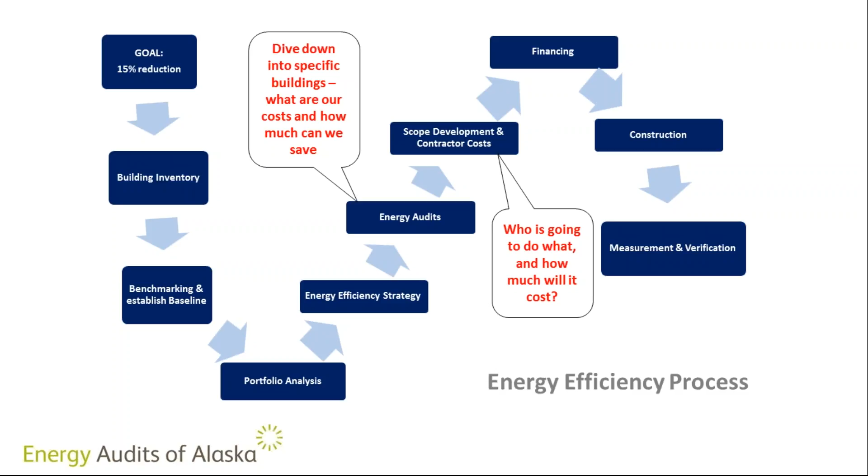What can we do to specific buildings? That comes out of the energy audit activities. Who's going to do what and how much will it cost? That comes out of the scope development. How are we going to pay for it? Comes out of the financing piece.

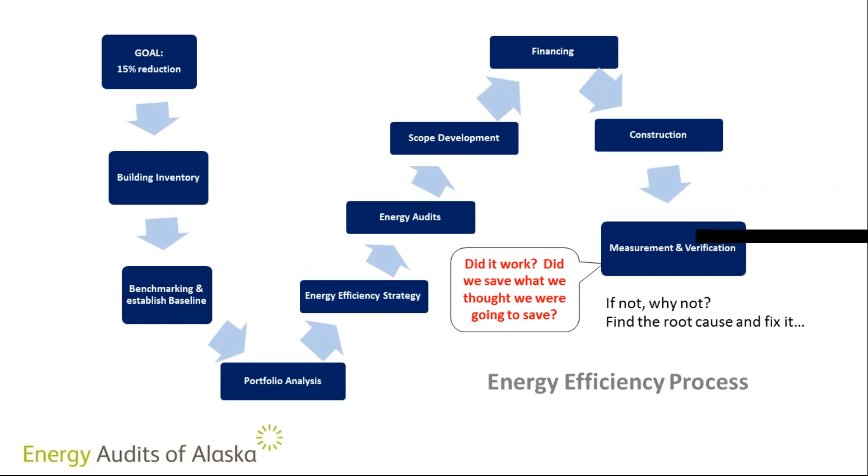And then let's make it happen. Comes out of the construction piece. And then finally, did it work? Did we save what we thought we were going to save? And if not, why not? We've got to find the root cause of why we didn't save what we thought we would, and fix it.

So a typical energy audit includes the benchmarking, the baseline, and an audit. And you can see why just having an audit is not enough.

The building inventory piece and the benchmarking piece has been under evaluation. It's been in process for a number of years. AHFC, Alaska Housing Finance Corp, has an ARIS database, and state agencies and a lot of your buildings have been input into that database.

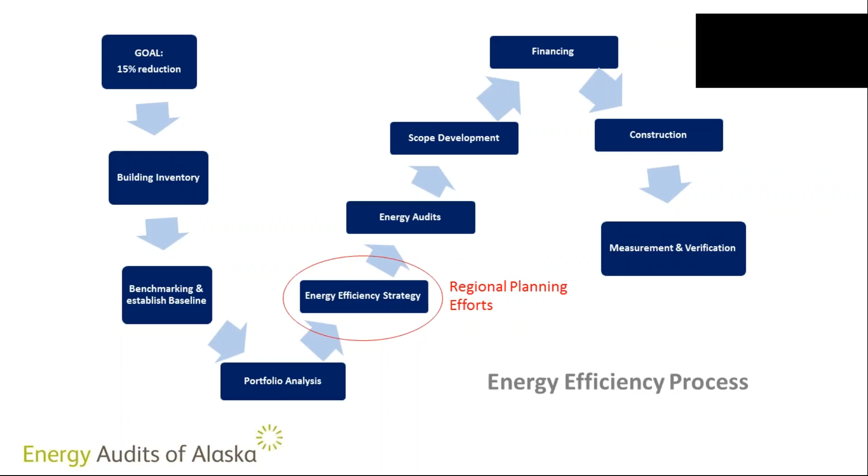And the most comprehensive vehicle, I guess you could say, for energy efficiency is what's called an ESCO project. ESCO stands for Energy Service Company. Amber Donahue from Siemens is going to be talking about ESCO projects. Siemens is an ESCO. In that case, all of those pieces are included in the project.

Portfolio analysis is kind of an orphan here. It's not dealt with very much at all, and I'm a big proponent of it, so we'll get into that in a little bit more detail.

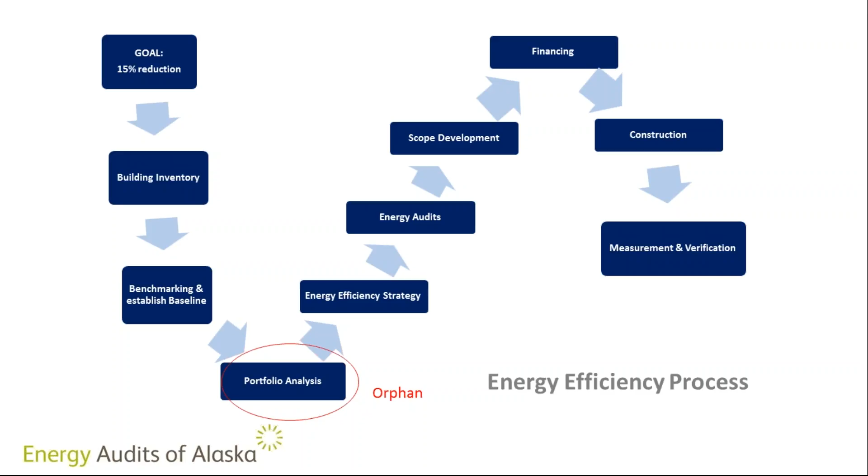So why energy efficiency? And how much is it going to cost? How much can I save? And what happens if I do nothing?

So the why—the first piece that I look at when we talk about energy efficiency is, where are you on the energy efficiency curve? There are certain energy efficiency measures. I'm going to call them EEMs. They're also called energy conservation measures, ECMs, but I'll use the term EEM.

There are certain EEMs, like setback thermostats and air sealing, that generate large savings. And then as you move up the curve, or to the right, the EEMs start to generate less and less savings. That doesn't mean they're not important. It just means the immediate savings is less.

Air sealing and setback thermostats are commonly the quickest return, highest savings measures in small buildings. If you've got a larger building with mechanical ventilation, meaning air handlers, then oftentimes air handling issues—the amount of outside air you're bringing in, the amount of exhaust air, et cetera—those are going to be the biggest bang for the buck EEMs.

But in smaller buildings, it's going to be setback thermostats and air sealing, and then following that is lighting. In buildings with high amounts of refrigeration, like stores, village stores, refrigeration is going to be a big one. And then envelope upgrades, even though many buildings need them, they're not a high return, quick payback item. They're typically a 20 to 30 year payback.

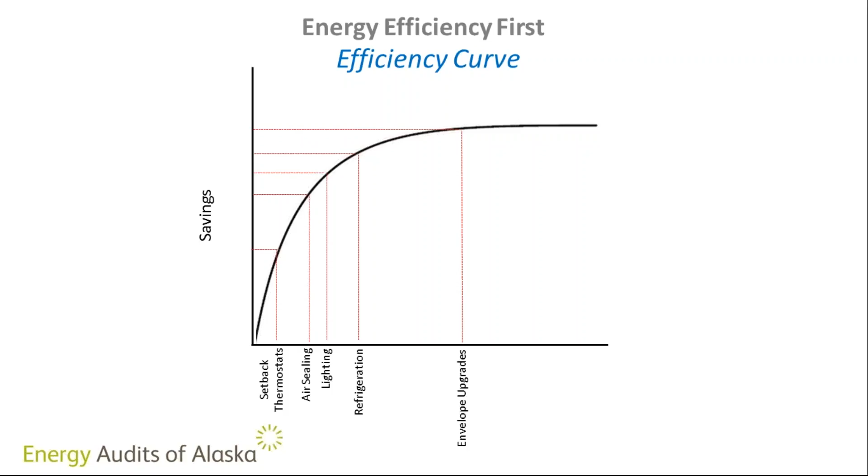Kwethluk was one of the 5 communities in Alaska that was awarded a START grant, or activity technical assistance through the START program. It's a Department of Energy program through the Office of Indian Energy, I believe. I was part of the team that went into Kwethluk and performed the analysis there. What we decided and what they approved was a community-wide efficiency program. What can we do across the whole community to affect energy consumption?

Excuse the noise in the background. Sorry, okay, I'm back with you.

Excuse the technical difficulties. So what we found was the average homeowner's electric cost is $1,200 a year. Their average fuel cost is $4,000, and the total non-residential energy cost in the village is about $500,000. The total residential energy cost is about $1 million. This was across 188 homes and 25 commercial buildings.

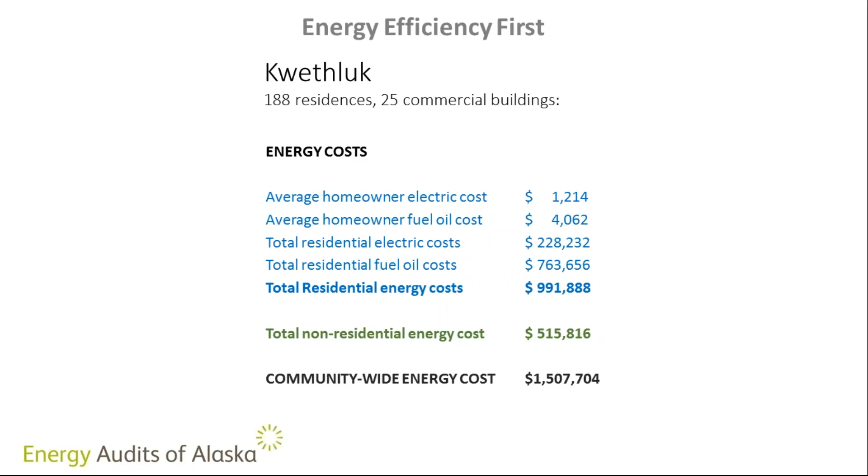And the goal in Kwethluk was to implement 4 EEMs, which included setback thermostats in every building, air sealing of every building, LED lighting throughout the entire community, and upping the insulation in the attic to R60. Those were the 4 what we call low-hanging fruits.

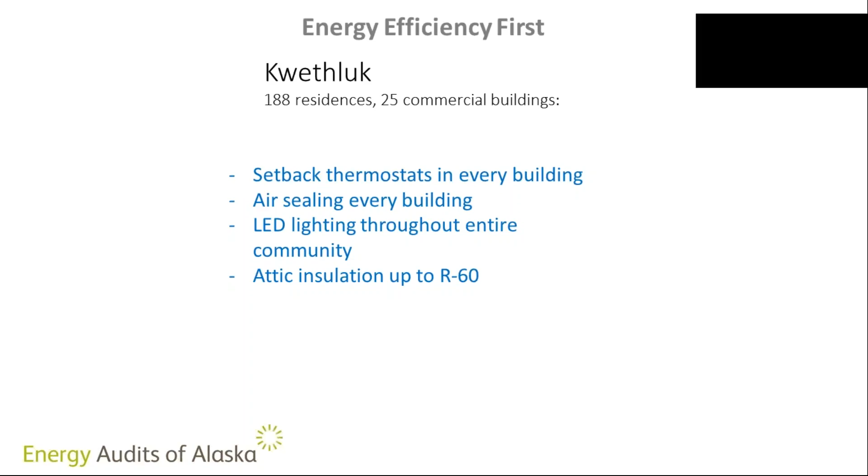So this example is presented as a way to show you what's possible in the village or in a community, a rural community, if you look at it from a community-wide standpoint. Overall, it's just under 13% savings in the community for the 4 simplest lowest hanging fruits that are available in just about every community.

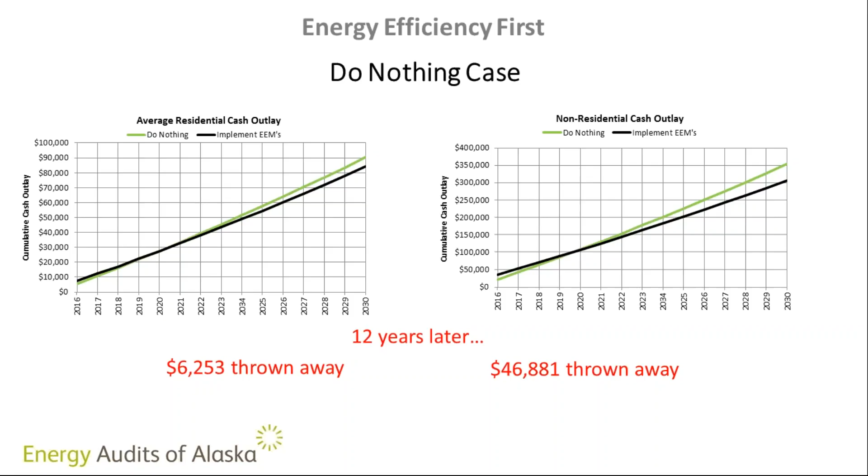So the difference is, I said $7,000 on the chart to the left - it's actually $6,200, and $46,000 for the chart on the right. And I consider that thrown away money because you'll never get it back. So the steps in an energy efficiency process - let's take a look at these three first.

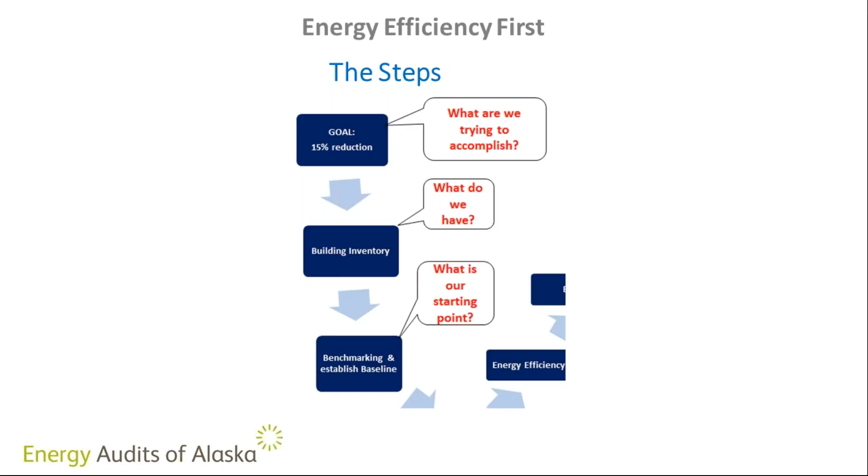Putting together an inventory of your buildings is pretty simple. You need the name, the address, the size of conditioned space. So what that means is if you've got a building with an unheated garage, that unheated portion is not conditioned, so it doesn't count in the size.

You need the use and occupancy, what's the building used for and how many people are in it. And is it occupied? Sometimes it's vacant. And then gather together the electric meters, the oil accounts, if there's natural gas involved.

Then what you're going to do with that information is start to establish a baseline. I like a 3-year baseline of electric consumption. You'd sum all the meters if there's more than one meter. And 3 years of fuel oil deliveries.

Typically for fuel oil, you're going to be looking at deliveries and not consumption, unless you have a cumulative meter on your day tank, which is strongly recommended. So there's going to be some discrepancies in fuel oil deliveries. If, for example, in December of 2015 you filled up the tank, but in December of 2016 the tank was empty, you're going to have a difference there, so you'll want to average that.

You can take this information and put it in a spreadsheet, or you can upload it into the ARIS database, and the folks over at AHFC can help you with that. There's also a federal tool developed by the Environmental Protection Agency called EPA Portfolio Manager. That's basically equivalent to the ARIS database, but on a national scale. You can input your utility, electric, fuel oil, etc., into EPA Portfolio Manager on a monthly basis, and it gives you trends and charts.

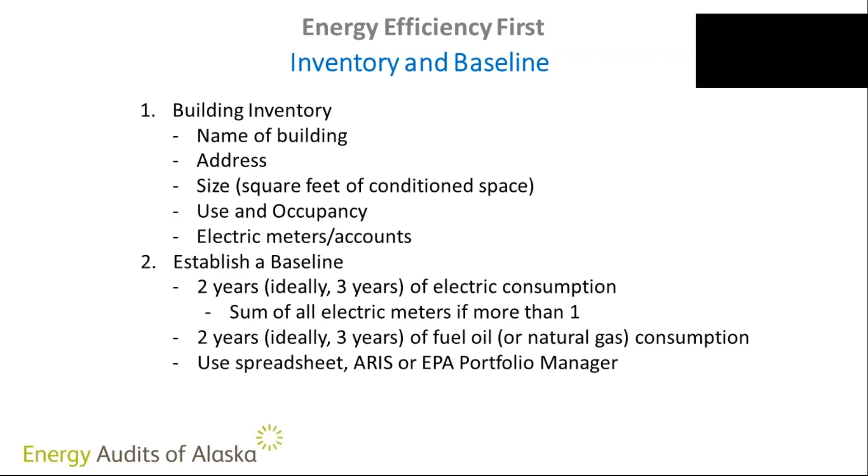When you use a spreadsheet, it can get pretty complicated pretty quickly. There's a lot of data. This is a spreadsheet that has about just under 3 years of data, fuel oil and electric, for about 12 buildings in Quinhagak.

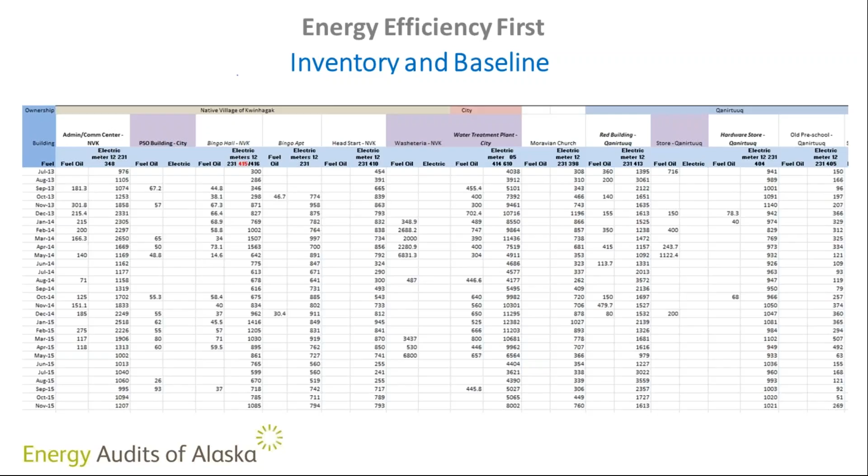Benchmarking and portfolio analysis. Benchmarking is when you compare your building to other buildings in the community that have a similar use and occupancy. And if there aren't any in the community, then you need to go up into a regional look, and if there aren't very many in the region, then you've got to go statewide.

What I use to compare buildings in a benchmarking phase is heating degree days, HDDs. A heating degree day is a measure of the severity of the cold weather. To give you an example, there's roughly 20,000 heating degree days in Barrow, about 8,000 in Juneau, and roughly 12,000 in Anchorage. So as you get colder, you have more days of heating and more degrees of heating. I'll talk a little bit more about that in a minute.

The two measures of comparison that we use in benchmarking are the EUI and the ECI. EUI stands for Energy Utilization Index, or Energy Use Index, and ECI stands for Energy Cost Index. The ECI is not very valuable across regions because the cost of, for example, oil can vary from $10 a gallon to $2.50 a gallon. But within your community and within your own building inventory, an ECI is valuable because the costs are roughly the same.

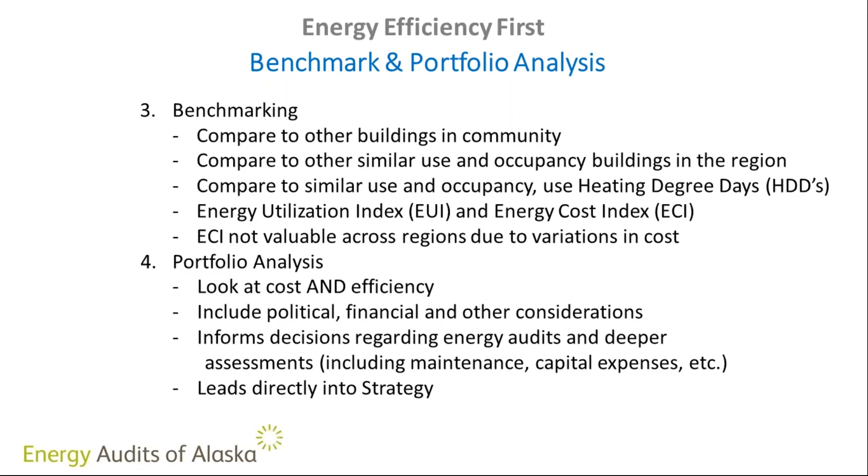The portfolio analysis looks at cost and efficiency, and it includes other considerations, for example, how much money are you spending on the building. The portfolio analysis will really inform your decisions with respect to energy audits and deeper assessments. And the portfolio analysis leads directly into strategy.

This is an example of a number of buildings. I just picked office, library, museum, community centers—all similar type buildings. The gray bar at the top of each building is the number of heating degree days. You can see the top building there, Barrow—that's the shipping and receiving building in Barrow—has a lot more heating degree days than the courthouse and the city hall in Yakutat.

The orange line is the heating EUI, and roughly the heating EUI should be equivalent to the number of heating degree days. You can see that in Barrow it's fairly close. In the Unalaska Library, it's pretty close. The Yakutat Courthouse is pretty close. But in the case of the community center in Unalaska and the city hall in Yakutat, the heating EUI is significantly higher—2 to 3 times higher than the HDD. That tells me those buildings have issues going on in the heating systems, and we need to look at that.

The electric EUI is the blue line, and you can see there's quite a broad variation there. The Yakutat Courthouse is the lowest. Community Center, again, is the highest.

Electric EUI is often dependent on the number of hours the building is open and what's going on in that building. Stores, as I mentioned before, with higher refrigeration loads are going to have a higher electric EUI. But these buildings are all fairly similar, so the electric EUI should be fairly close to each other. And you can see that it's not. So this is one piece of a benchmarking and portfolio analysis.

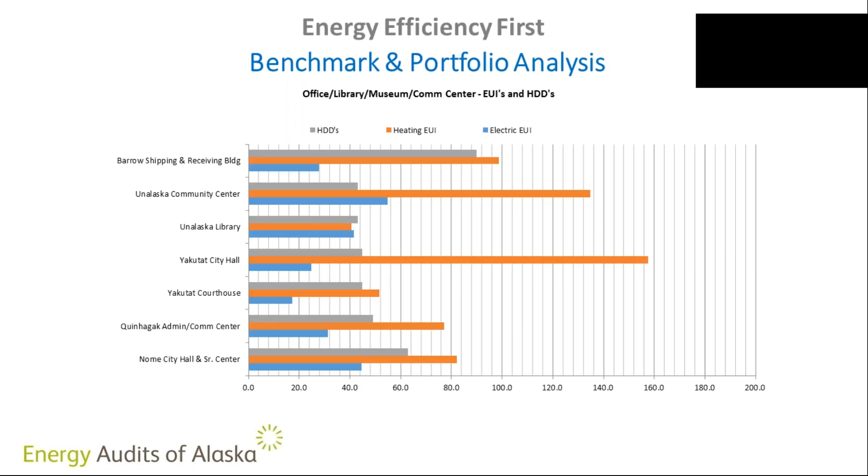So you can look at some of these buildings like the Yakutat City Hall or the Unalaska Community Center. The Yakutat City Hall is actually a very small building, and the EUI, by the way, the units are kBTU, or 1,000 BTUs per square foot. Again, it's broken down on a per square foot basis. You can see that, for example, the Yakutat City Hall has a very high heating EUI, but that happens to be a very small building.

So that's what this E factor considers. It's the cost and the efficiency. And again, this is what I use to determine, or to inform, a deeper analysis of where we go with energy audits.

So to finish my section here, the benchmarking, baselining, and portfolio analysis feed the owner's goals, community goals, maintenance, and capital expenses. It informs all of these different other factors.

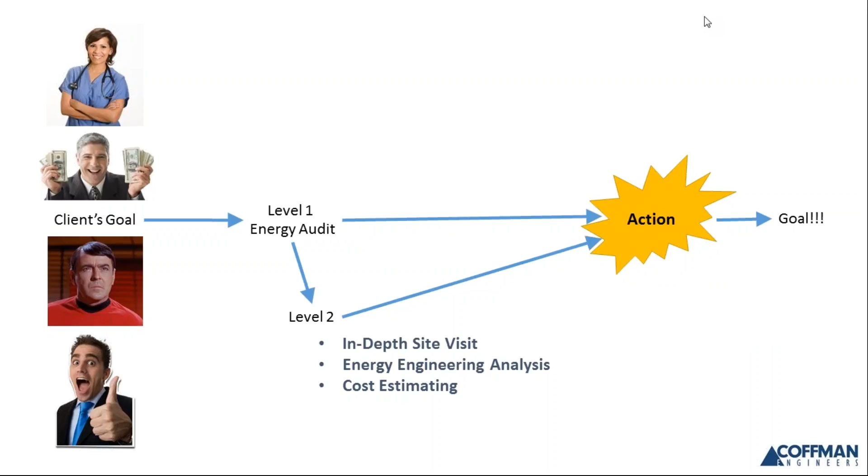The last level of audit is a level 3 audit, and this is the most detailed audit. I've personally only done probably a handful of these audits. Most of the audits I do are level 1 or level 2, and the reason is because most people don't want to pay for the extra effort that goes into doing a level 3 audit.

But level 3 audit is a much more detailed site visit, and really it's taking all of that information and dumping it into a computer model and running that model for every hour of the year, so for 8,760 hours in a year, and pumping out results for you.

This is usually used in large capital improvements, and usually for larger buildings, maybe the school in the community or the water plant, and it really involves a more refined cost estimate, and it's definitely the most time-intensive audit. One example that I always give with this level 3 audit is this is actually a building

here in Anchorage that I worked on, and there was a large office building, and the owner of the building hired us to do a level 3 audit and said, hey, you know what, this guy has this tinting to the windows that I want to put on, and it's going to cost a lot of money, but he promises me it's going to save a bunch of money.

We say, okay, well, let's model this and see what happens. And what we found is that indeed, putting that window film actually stopped a lot of heat from coming into the building, and the cooling system didn't have to work as hard, so they actually saved a lot of electricity. But on the flip side, they had to burn a lot more natural gas to compensate for that heat that they lost. At the end of the day, there really wasn't that much savings, and it was going to be like a 100-year payback for doing the improvement. So sometimes it's nice to do these audits to figure out what doesn't work. Knowing what doesn't work is just as important as knowing what does work.

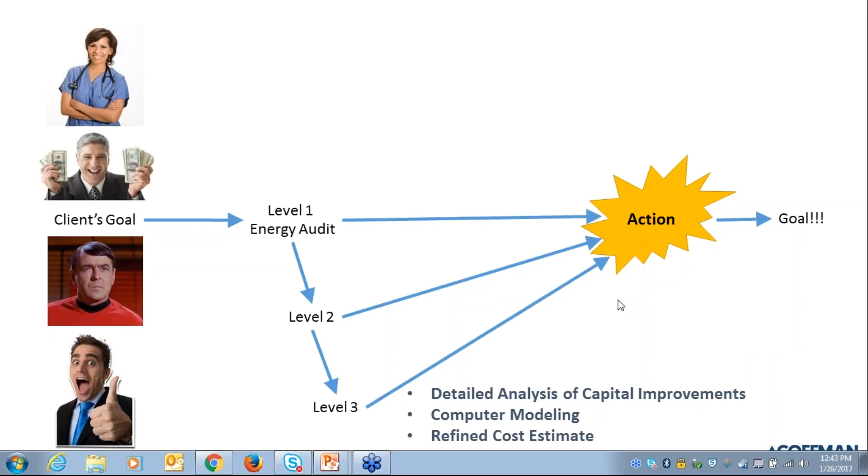I think I'm having a little problem here trying to move my slide forward. Hold on a second. There we go.

The term commissioning comes from shipbuilding. So imagine you have a 50-foot commercial fishing boat out in Bristol Bay that someone's building. It's probably a good idea that before that ship goes out and sails in those seas, they've tested all the different components on that system. You need to make sure the steering works, make sure the radios work, make sure the engine works. A lot of times this isn't done with buildings. A contractor will build a building and then hand it over to the person that bought it, but they won't test all the different systems to make sure they're actually working right.

So that's commissioning. And retro commissioning is the act of doing that whole commissioning project on an existing building. You may have a building in your community that was never commissioned or hasn't been retro commissioned in a long time, and those are great buildings to go back to and find out what's going on. A lot of times this gets into some pretty intense details with the control contractor that works on the building. The school may have a very complicated control system.

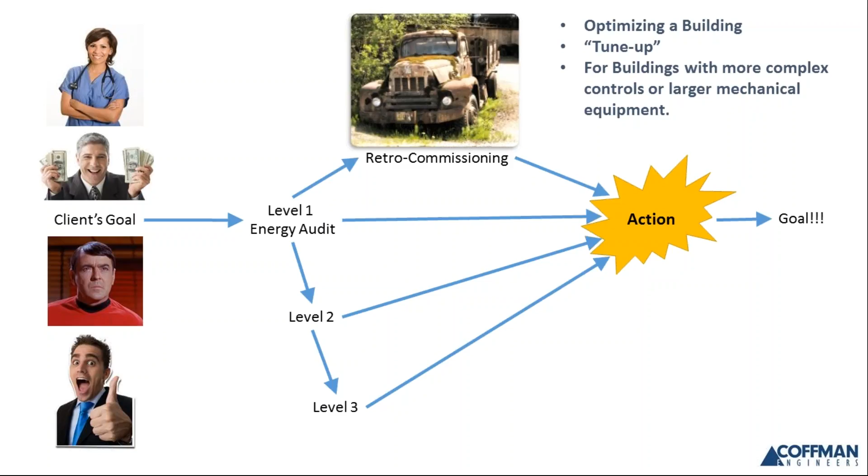In Fairbanks, for example, buildings can range from about $2 a square foot all the way up to $8 a square foot. So there is room for improvement for this building.

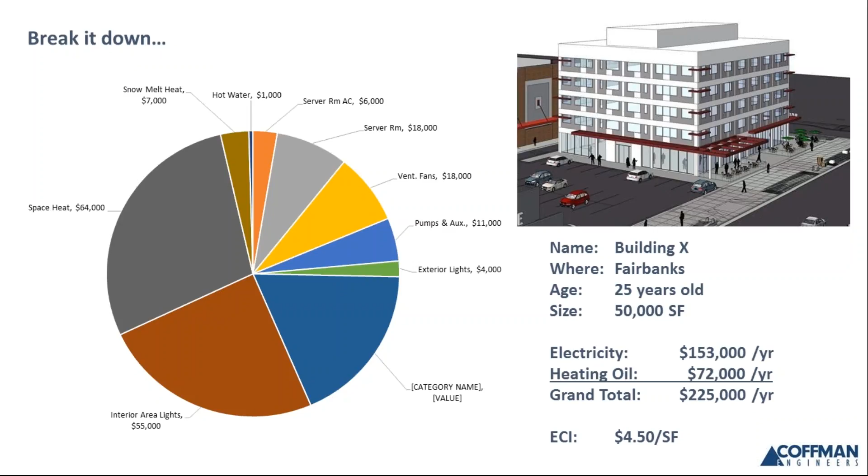I had a blast there. It was beautiful weather, like 90 degrees. It was crazy. I went fishing as well. So Nelson, you got a great community up there.

In your report, the first thing you usually get is all sorts of details about the mechanical systems, the lighting systems, and the envelope. But at the end of the day, you kind of want a list of just what are those energy conservation measures that I actually want to do, and have them ranked. We usually put that in our executive summary.

Also, in these studies, the auditor may find things that you should look into for future projects. One thing we found was that the school is actually a very big building there and quite complicated, which would be a perfect candidate for a retro commissioning project. Also, doing a lighting design at the school could be great for improving to LEDs.

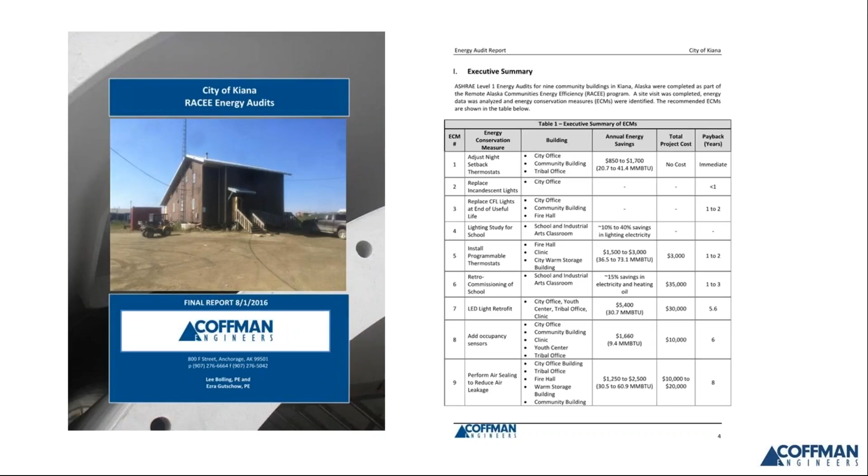Usually when we're doing these audits, these are the top 5 low-hanging fruit that we find, so you should be looking at all of these for all of your buildings. You don't really need an energy auditor to tell you this, but I just wanted to give it to you. The first one is just how is the building controlled.

That's your thermostat. Turning down your thermostat or doing a night setback where the thermostat turns down during the nighttime hours is great. One thing to be aware of is that if there's a power outage, your thermostat will probably reset itself, so you have to go back in and reprogram it.

The second one is LED lighting. LED lighting has come a long way, and improvements with LEDs are really great to do. The next thing is weatherization, so filling in cracks, air sealing, all of that good stuff.

The fourth thing we usually find is controlling motors on pumps using ECMs or VFDs, variable frequency drives. And then the fifth thing is reducing the amount of excess outside air.

So if you have fans that are bringing in ventilation air for people to breathe in the building, figuring out how much air you actually need per code and to make a healthy building, and not bring in any more than you really need to, because that increases costs.

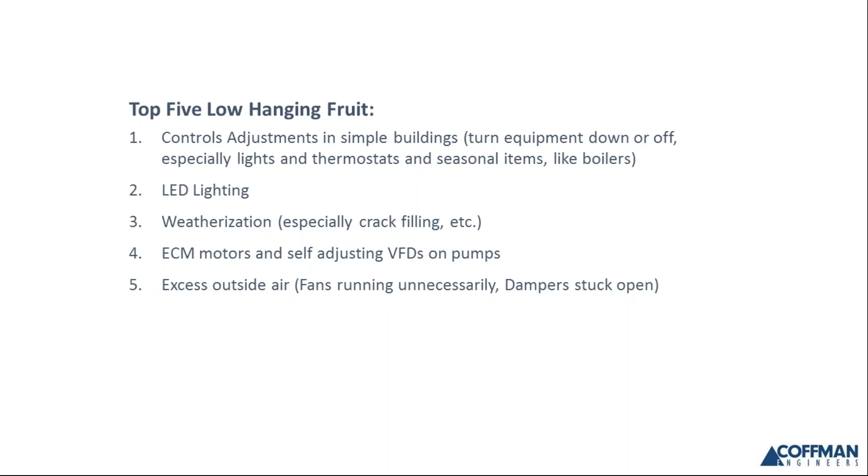Okay, we're going to replace the lights in the school, but how many lights are we going to do it? Where are the lights going to be stored? What kind of light are we doing? Where's the contractor going to stage his equipment?

Also, you may need to obtain design and engineering costs. Before the contractor could install these lights, or let's say a boiler system, you would need to get a stamped design from a professional engineer, a mechanical engineer. So there's costs associated with that engineering, and that's something to look at.

Once you have engineering design, it really helps. You have a scope of work and you have design drawings if you need them. Then you can give that out to a contractor. You give it out to 3 or 4 or 5 different contractors and get bids on the work.